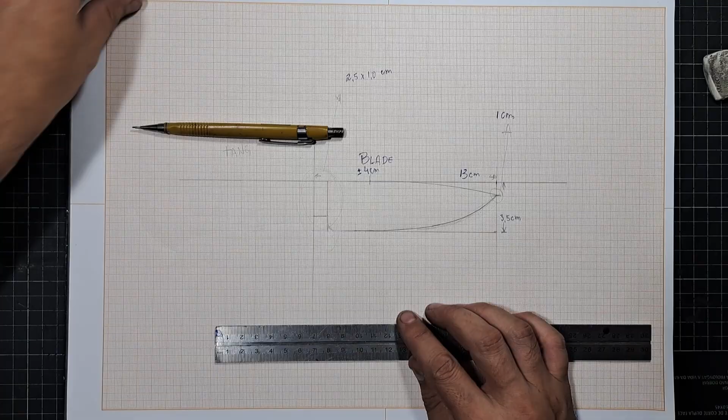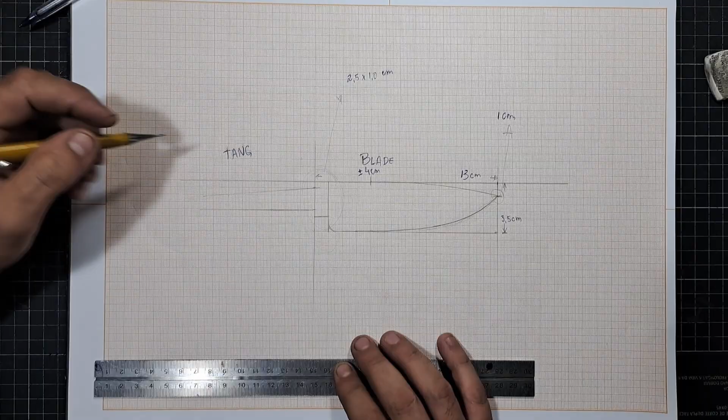Now we move to the tang, which is the part that goes inside the handle. I leave it with at least 8 centimeters in length. The longer the tang, the stronger the knife as a whole, so this makes a difference. Using the ricasso as a base, I go down 5 millimeters on the top and up 5 millimeters on the bottom, then adjust the lines and define the tang shape.

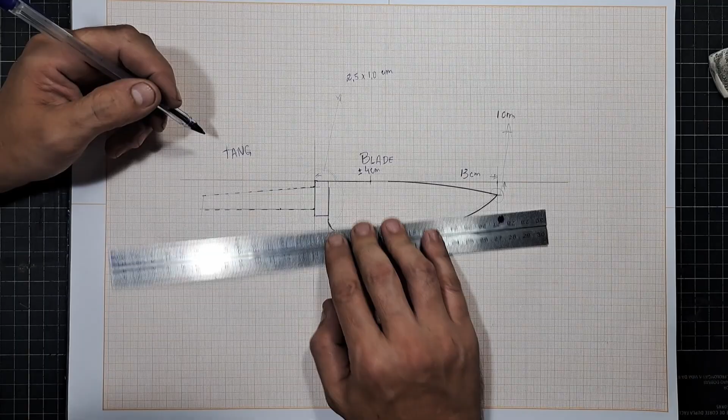Now that everything is sketched, I reinforce the drawing with a pen. And an important tip. If you transfer this drawing to thin wood or plastic, it will make it much easier when moving to steel.

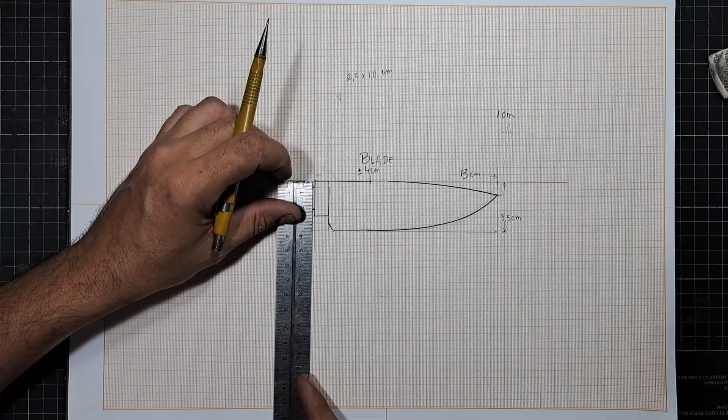Now we move to the guard, and this is one of the most common beginner mistakes. The height of the guard must match the ricasso. This is not optional. It must align perfectly with the top and bottom lines of the ricasso. It can be 1 millimeter larger, but no more than that. But it should never, under any circumstance, be smaller than the ricasso. If the ricasso is much bigger or much smaller than the guard, that is a serious mistake.

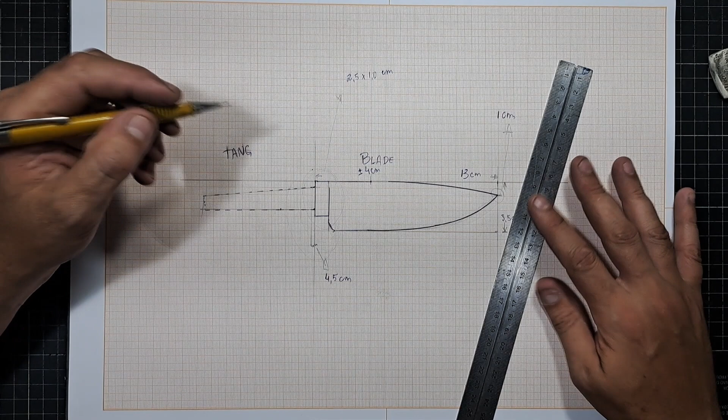With that defined, I draw the part of the ricasso that sits close to the blade, with 4.5 centimeters in height. At the point where the guard meets the handle, at the height of the ricasso, I draw a curve and adjust the shape. To make this curve, I use a bearing with the same diameter as the one I use on my grinder.

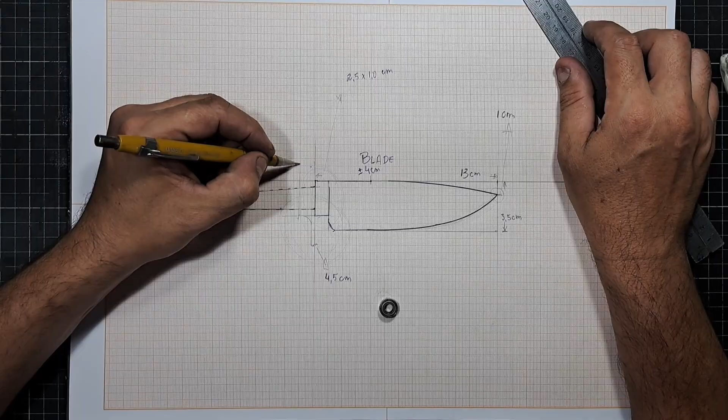The width of the guard stays between 1 and 1.2 centimeters. Then I reinforce the drawing. You can also make a template of the guard to make things easier later.

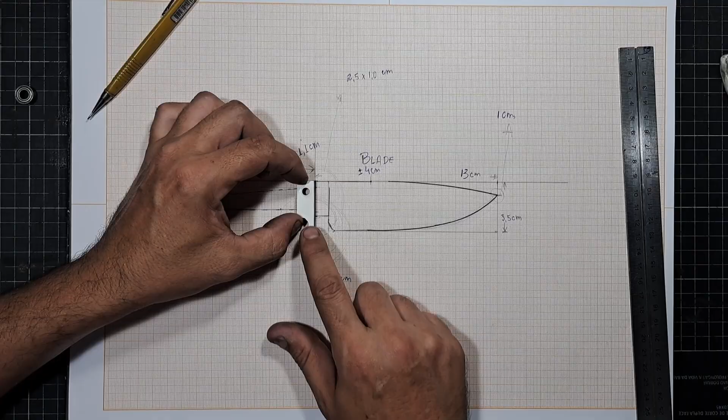Now we move to the handle. I use the vertical line as a reference for the total length. About 12.5 centimeters. Then I mark the finger area, which is around 9.5 centimeters from the reference line.

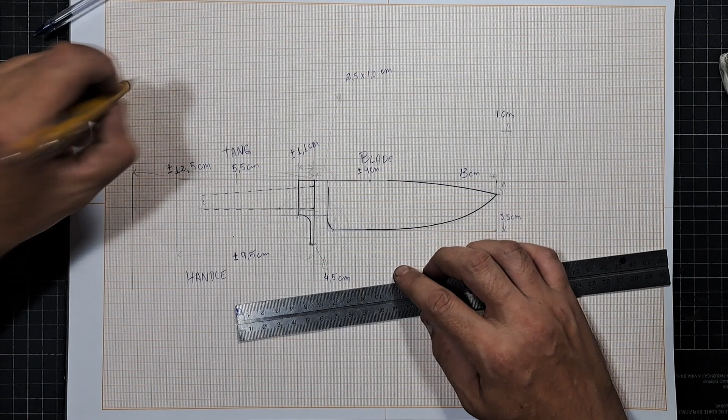After that, I define where the curvature of the handle spine starts toward the pommel, roughly 5.5 centimeters from the reference. The final drop of the handle I place slightly below the blade tip line, about 1.5 centimeters. I draw the curve freehand and then refine it with the ruler.

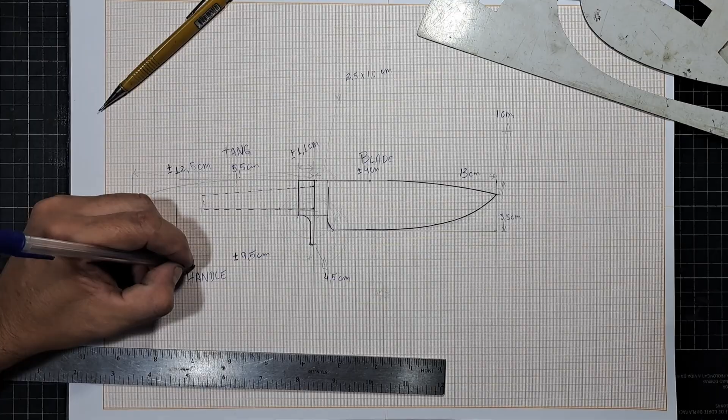Now I mark the transition point of the pommel, which will be about 4.5 centimeters from the base. Again, I draw the curve freehand and then adjust it.

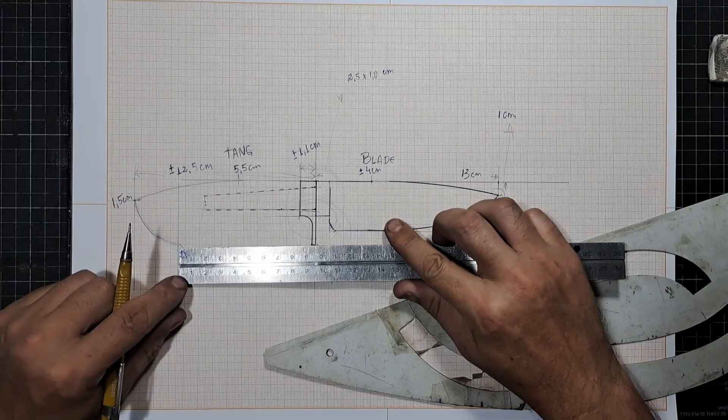Now we move to the lower part of the handle, where the fingers sit. I start by marking the midpoint between the two lower points. Then I define the height, here between 3 and 3.5 centimeters. I connect this point to the guard, always being careful not to go below the lower line of the ricasso.

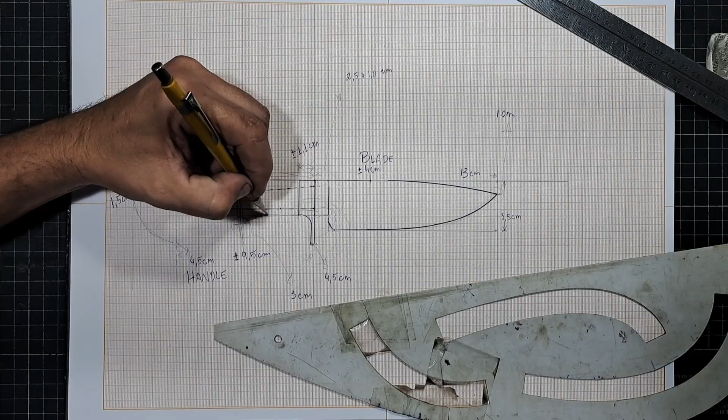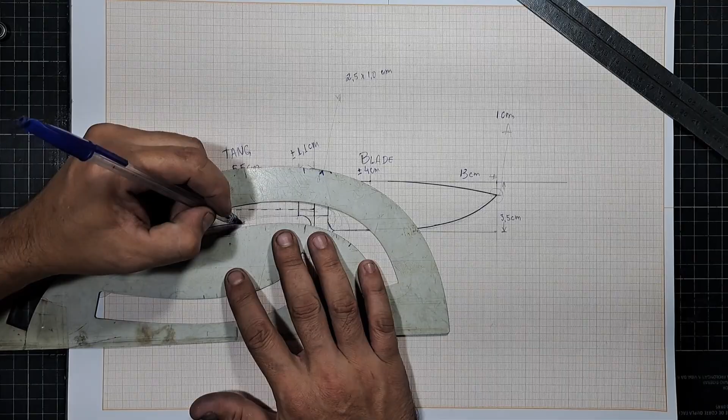And I close the final line of the handle. Now it is just a matter of finishing the drawing and reinforcing everything with a pen. And again, I recommend making a template. It will make the execution much easier.